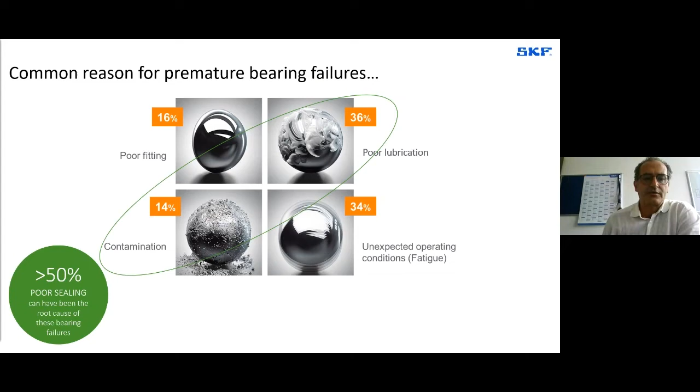So it's very important to have the right choice in terms of design and also in terms of material, to be able not only to, as we can see from this picture, but to be able to have the main function of the seal, as you can see from the picture.

So we have seals integrated to the bearing, able to keep inside grease or oil and keep outside the contamination. We have the same function for bearing seal or seal alone assembled outside to the bearing. What is very important is that the seal cannot fail, because if we have grease leakage, we can have a certain limitation on the life of the bearing.

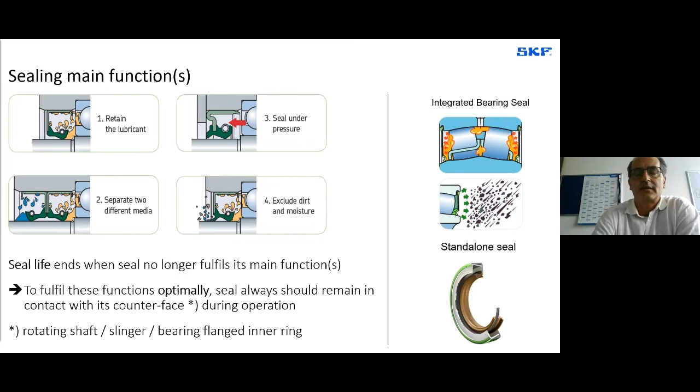But the same, if we have contamination ingress, we can have more or less the same failure on the bearing. So again, what is very important is to have the right choice for the application, for the right geometry, but also for the right material.

One typical case where it is possible to have a big contribution and to offer a very good solution, to have very robust tools, is to have a different configuration. So this is just an example where it is possible to have bearing seals and to have protection of the bearing and to keep a certain grease inside the bearing, to have a second barrier able to keep

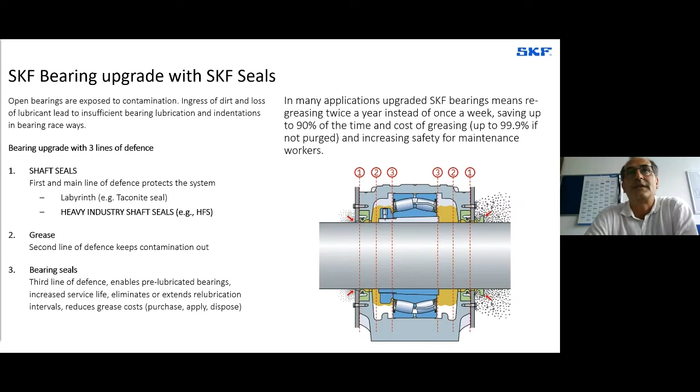inside again grease or oil or separate the media, and to have again another extra sealing that is machined in this case, where it is possible to have extra protection from the environment. So just to have a good protection of the complete system and to avoid any issue during the application.

Just some typical examples of a wider range of application, of course. So we are speaking about all bearing families, from the small DGBB to the bigger one that is for the large seal or SRB, where it is possible to assemble and have a component integrated to the bearing, or it is possible also to have an extra component outside the bearing.

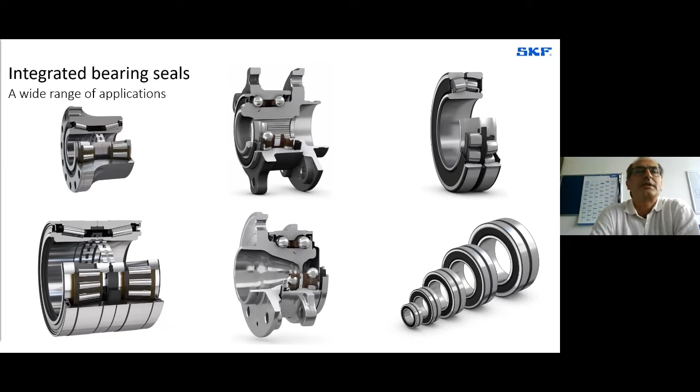Here are some typical examples where it was possible to have this kind of job and to have a very good solution to offer the market. In this particular case, the spherical roller bearing, as you can see from the picture, is a typical work of the bearing where there is oscillation.

There was a different solution in the market, so we standardized using just one common solution to fix some problems in production, and to improve the logistics from the factory. Using this kind of geometry we were able to standardize not only the bearing but also the seal, offering a very good solution able to reach more or less 50% friction reduction.

That is a very important point because, of course, it also means less energy consumption. And improving the grease life means we can increase the maintenance or lubrication interval of the part, and also have the possibility of higher speed.

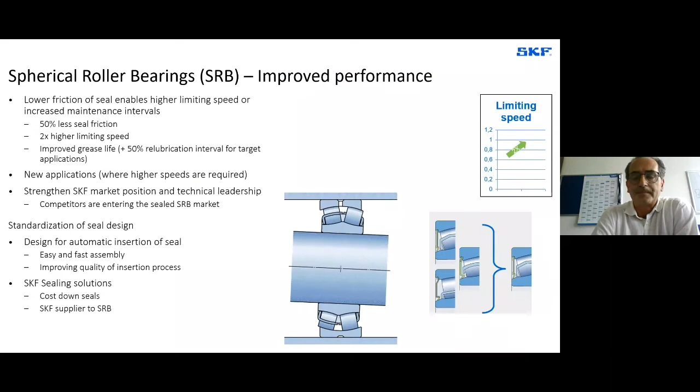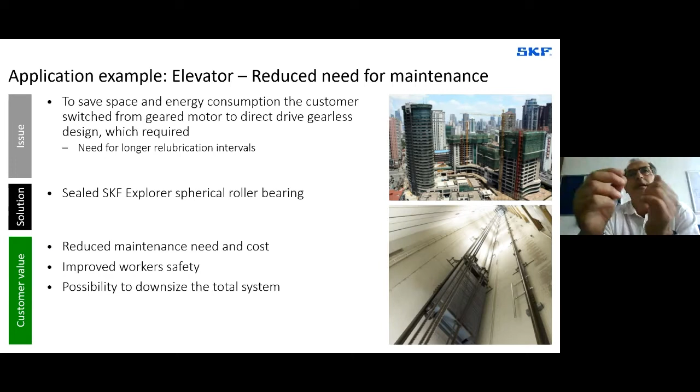In the final application, we have a good advantage because there is the possibility to reduce friction, increase the speed, and reduce the complete unit by changing the system. Of course, we need a different solution to assure that the grease inside the bearing remains for a long time - I don't want to say life, but more or less, yes.

Another typical example where it's possible to customize and offer a very good solution in terms of sealability, and fulfill the complete requirements from the application, is again a spherical bearing, but in this case not for the elevator market, but for industrial use in general. Also in this case, the solution was developed according to different requirements.

In this particular case, we fixed the parameters based on the current solution, and now we are able to reach more or less double the life. The sealing function is much better, and we can assure a different performance on the seal, on the bearing, the complete bearing.

This is a typical example of where this part is allocated. Of course, this picture cannot completely show the leakage of the unit, but shows how we - or the customer - can grease the part just to avoid having a different greasing interval. Of course, we have a lot of grease that comes out from the bearing, and this is a point we would like to avoid, not only from the bearing point of view, but also from the environmental impact and so on.

Using this kind of solution, we are able to better keep the grease inside, and also offer the possibility to grease the part without any other issue. So when the grease comes into the bearing, the lip will open, and when you see just a small amount of grease, we know that the bearing is completely full.

Same application, but a different bearing is used for this kind of solution. In this case, we are speaking about a more or less similar application and similar final industries, but the bearing is not a spherical roller bearing, but a taper bearing. In this case, we have a different condition in the application.

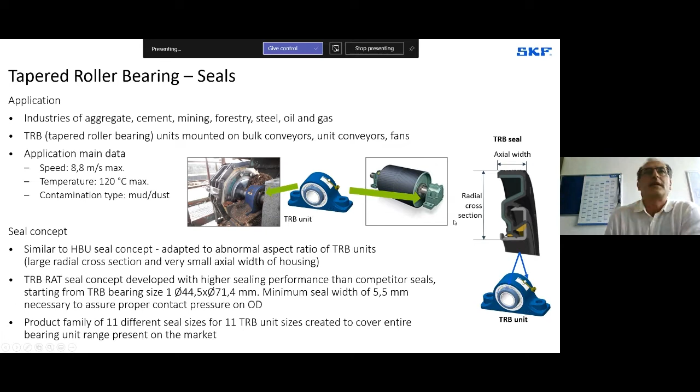It was possible also to allocate a different solution, not only with two or three different lips, but in this particular case we also had the possibility to assemble a cassette seal, because the environment in this case is different and quite, let me say, severe.

Another big family is the plain bearing, where the importance of this application is to have a very clean surface where the seal has to work. Otherwise, considering that this kind of bearing has no grease, if we don't have a good seal system, we can fail in a very short time.

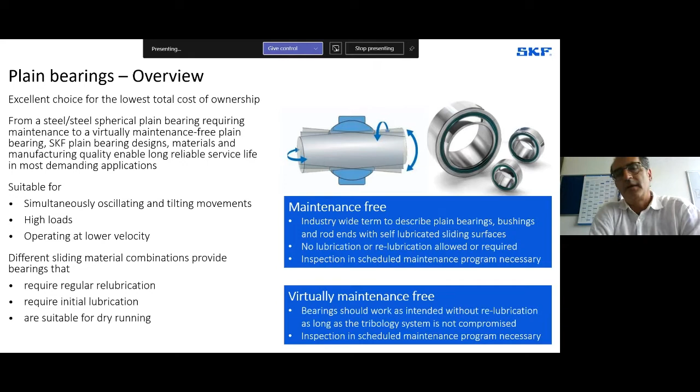This is a typical bearing that is used in many industries, not only for industrial applications, but also automotive, trucks, agriculture, so it's very important to have a very good solution able to avoid any problem on the bearing. The typical solutions are the three different ones that we can see here.

We have the solution that is able to be anchored on the groove of the bearing, but we put more attention on preventing, when there is rotation of the bearing, any problem in this area - because when there is rotation, the possibility of a flip, the lip reversing, is quite common.

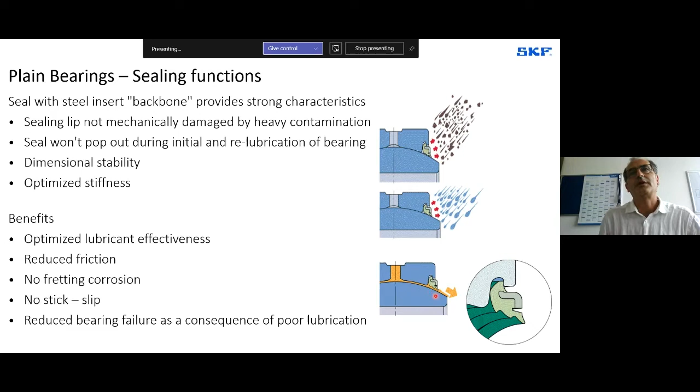We must not create a lot of friction, because otherwise we can cause damage during this movement, this oscillation of the bearing. We have to offer a solution that is very robust in terms of sealability, able to avoid any water or contamination ingress into the bearing, and able to keep the bearing surface very clean, avoiding friction or any other problem.

The industrial application where this kind of bearing is used is, of course, used for many industries, and it's very important. For example, in this particular case, we have a concast used for metallic parts to create the metal, and the temperature range is very high, so we have to pay attention to the material instead of the geometry.

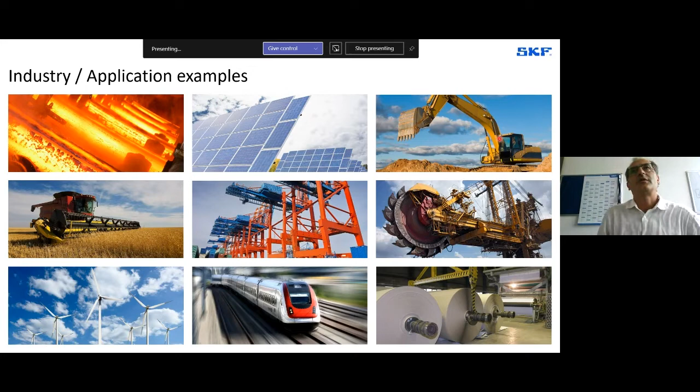While, for example, it's very exposed like in agriculture. In this particular case, the issue is not linked to the temperature, but to the environment and the contamination.

Making a difference means having a very good solution. We know that to work and to substitute or maintain parts in such machines is a very huge job, and it costs a lot of money to have a very good solution.

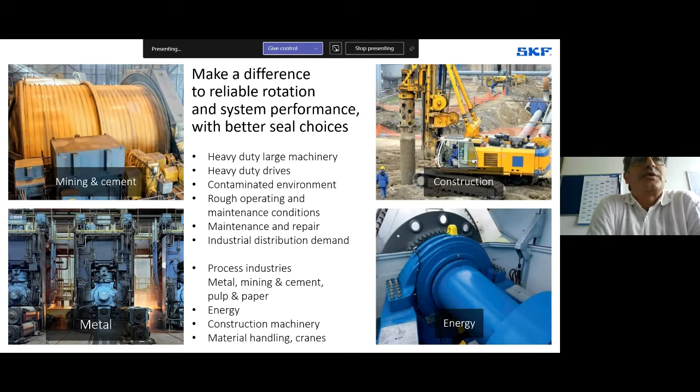So having a good solution means avoiding any problem or issue in the real application, but also avoiding any extra cost due to maintenance, repair, or relubrication intervals. So the intention is to have a very robust design that can give the best performance and the best value added possible to the final customer.

One other area where we are focusing our attention is food and beverage. Apart from the different geometry used, there are seals alone mounted as a complete unit outside the bearing, or there is a different labyrinth seal integrated into the bearing. The important thing is that we have material compatible with this food market—not only the rubber material, but also other elements or plastic material used for other applications.

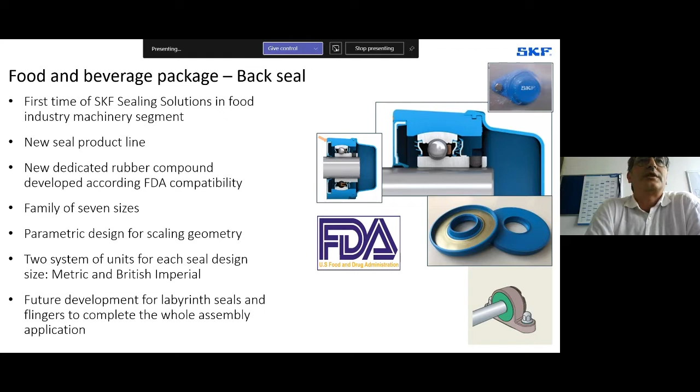Other area where we are present, and where we are investing a lot of time and money, is agricultural application, where there are different solutions for different segments of this area. For example, where there is a tractor and the axle on the tractor, we have a pinion seal, and also a wheel seal. A typical example is the MUD 11, which is a very robust design, developed in order to keep contamination outside.

You can see it's very robust, with a lot of lips that keep contamination outside—water, mud, and so on. In this particular case, we have the wheel with oil, and there is a seal able to keep the oil inside.

There are many other applications where we have more or less the same extra lip for contamination, but instead of a spring and lip dedicated to oil, there is a grease application, so we have a different concept. But at the end, the concept is to have a very robust design, like a cassette solution, just to improve and avoid any water ingress or contamination ingress.

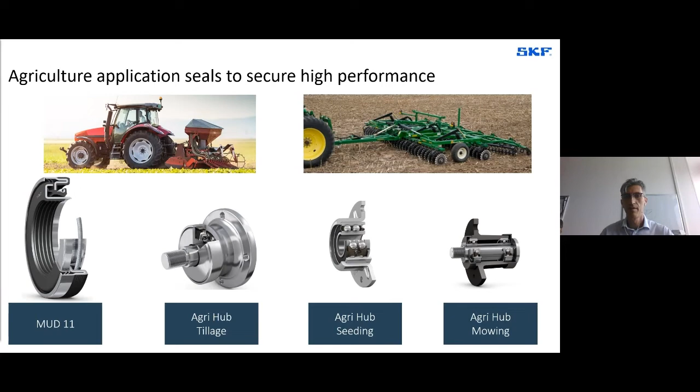Please go ahead. Now we move to other kinds of products: the HBU, hub bearing unit, used for car applications, and the THU, truck hub unit, used for the truck market. Here's an example to give an overview of what a bearing for a car means. This is in particular a third generation bearing - we'll see later what the generations are - and I'd like to show you all the parts of the bearing for a better understanding.

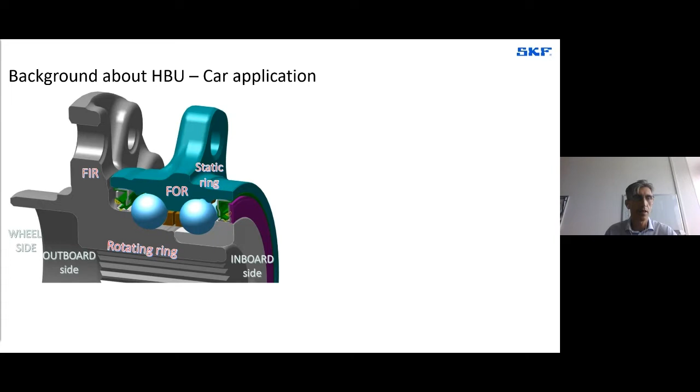First of all, on the left side you can see this is the wheel side, to identify the bearing in outboard side, inboard. We usually have a rotating ring, the internal one. This one in particular is called FIR, flanged inner ring. We have a flanged outer ring, that is a static ring in this part. We have the seal, inboard seal and outboard seal.

It's important to call them this way because, for instance, for the HBU3, outboard and inboard seal cannot always be the same seal, due to the fact that during assembly we have to take care of some operations, and we need to avoid issues due to, for example, lip reversal during assembly.

And we have on the outboard side a flinger in this specific case. That means it's just a metal part that is used - this one - it's a metal part used for the lip counterface.

We have an encoder, that is a magnetic ring used for the ABS system. For car applications it's 99% on the inside. Flinger and encoder provide the seal lips counterface.

Provide a seal with the counterface. That means, for instance, in this specific case, the complete system - we call it a cassette seal. That means seal plus encoder.

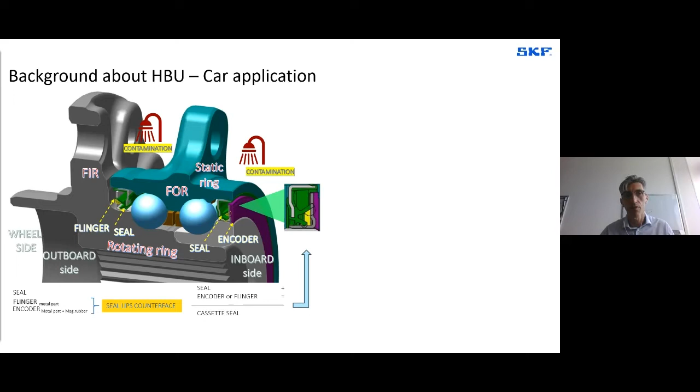Important to know that for car, but also for truck, we provide customized solutions and not standard solutions for all products. This is due to the fact that we have changes in dimensions and changes in performance due to customer specifications.

Same thing we can see for the truck application, and this is the layout we have, for instance, for a bearing in this case a THU used for this overview. One of the main differences is that for the truck we often, more or less always, have the rotating ring as the outer ring. The inner rings in this case are the static rings.

Then for truck we have two different kinds of seals used for the inboard side and outboard side. This is the wheel side, and it's an outboard seal, and for a driven unit, as shown in this picture, on the outboard side we have an oil seal. Oil is coming from the axle, and the bearing is more or less always lubricated.

We have this mix - we don't have to have... on the other side the contaminant is, let's say, the external environment. Then the kind of seal we are using on the external side is like this one.

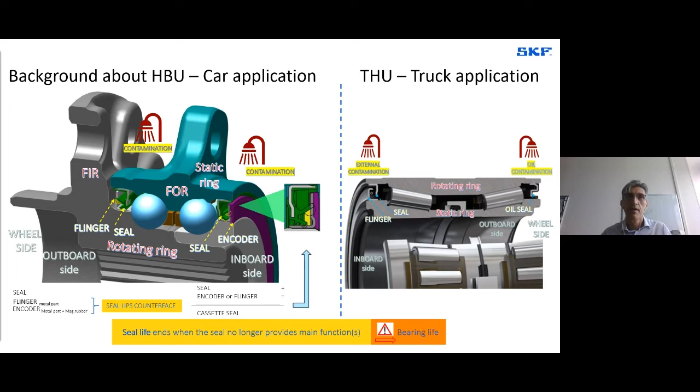Now I wish to show you the background about hub bearing unit and truck hub unit. Starting from the hub bearing unit for car, we can see that we can have different kinds of product. This one is the HBU1. HBU2 - now I will explain to you the main difference.

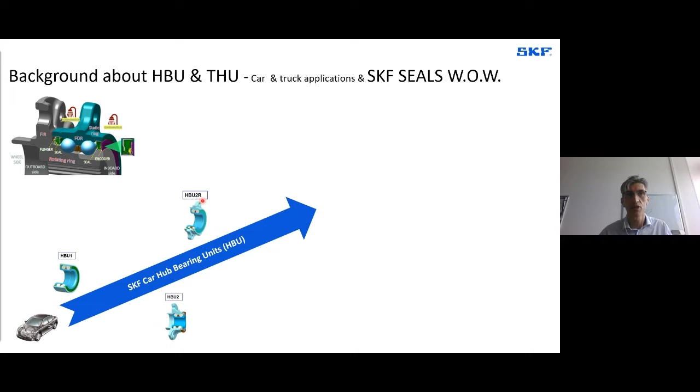The main difference between those two generations of bearing is that for the HBU1, we have the inner rings, while for the HBU2 standard one, we have the outer ring that is flanged. For this specific HBU2 generation, we also have the one called reversed - that means we still have the internal ring rotating in this specific case. We have cases where we applied the HBU2 standard with the outer ring rotating.

Then moving to the third generation, that is the one I showed you before, we have external ring and internal ring with flange. We call it flanged internal ring rotating. For this specific case, we have also tapered roller versions.

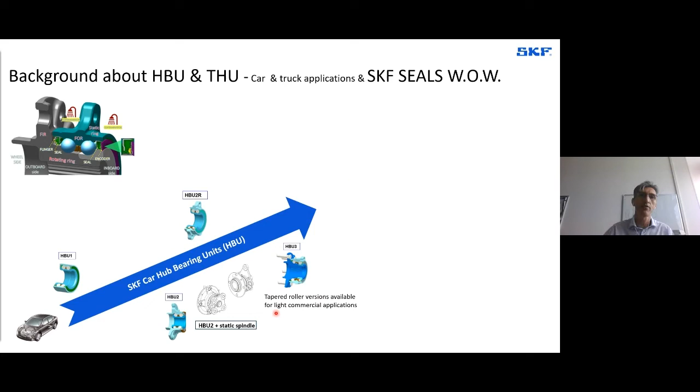Going through the applications for the trucks, we have also a kind of bearing that we call the truck matched unit. We can have assembled units and truck matched units itself. For this specific product, the seals are assembled by the customer itself.

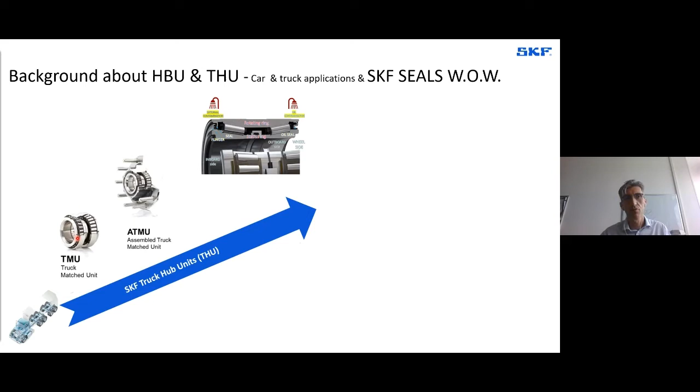Then we can move on to the other generations. The first generation is very similar to the car applications, and it means that we have an inner ring.

Daniele, sorry for interrupting. There are some interruptions in the audio. Could you please move your microphone a little bit closer to your mouth? Otherwise we have some interruptions. Yeah, I guess that's better like this. Yeah, hopefully. Okay, thank you.

Then here we have the first generation of the truck hub unit. We have no flange on both the inner ring and outer ring. And here we have generation 2, which has the external ring with the flange.

Those are kinds of bearings that we are supplying to our customer, and you have to consider that when we give these products to the final customer, the sealing system provided directly by us is already equipping the SKF bearing units, both car and truck units.

Then I would like to show you SKF's way of working. First of all, we look at the final applications, because we need to know where the seal is applied on the bearing, but not only the bearing—we need to know where the bearing is applied, which means we need to understand the corner layout.

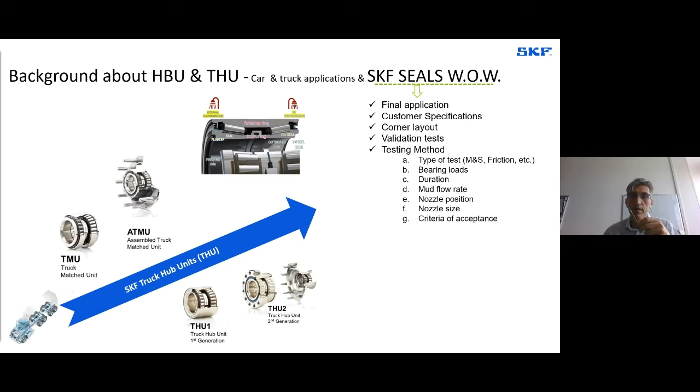It's also important to know which method we have to use for testing. We go through all those items: mud and slurry test, friction test, etc. These kinds of requests are really important to be evaluated at the beginning of the project, because performance in sealability and performance in friction are really important today—friction is one of the most demanding things coming from the final customer.

But at the same time, keeping the same level of performance while having less friction in our system is a good challenge.

Then we have to evaluate the bearing loads—meaning we have to see the relative movements in the parts and see how we can always keep the followability of our lips with the counterface, the duration of the test, the mud flow rate we have to have during the test, nozzle positions, meaning where the contaminant comes through, and nozzle size, which evaluates not only the flow rate but the pressure of mud going against the bearing during the validation test, and of course the acceptance criteria.

All those tests have to be evaluated at bearing level and component level, because some things are done directly on the seal itself, while several tests are done at the bearing level—meaning complete units. All those points allow us to identify or create a completely new seal concept.

In addition to that, we have to add some other studies. We do these activities when we receive new requests, for instance regarding low friction, by having the possibility to include new labyrinths—meaning that we need to have the space to create this labyrinth.

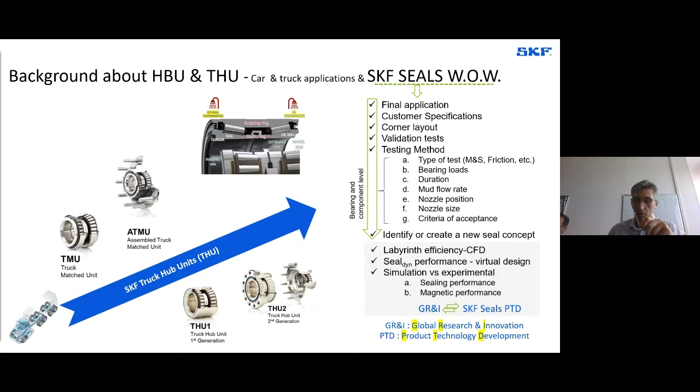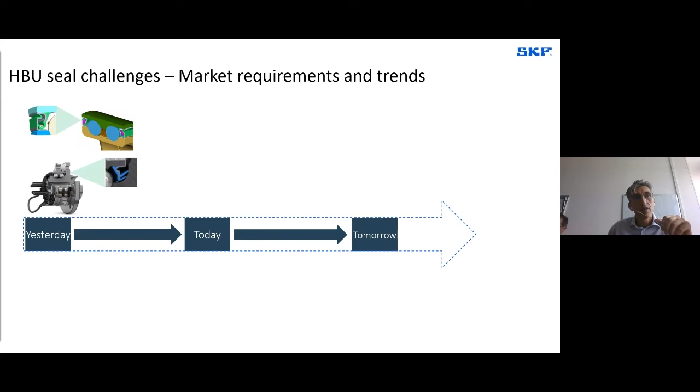Now I'm going to show you the market requirements and trends that we have for friction. Starting from the very beginning, this is the kind of old seal that we were using in the past. And this is a kind of seal that is still in use today, but is something that is going to be changing due to customer request.

We have some other products, as you can see on the outboard side. In the blue picture above, we have a seal that is sliding against the bearing itself, while at the bottom we already have a cassette seal also on the outboard side. This is due to the fact that the customer is asking for having also a stainless steel counterface for our lip.

Then in between today and tomorrow, we already have some solutions in terms of labyrinths. Of course, considering that friction reduction is really demanding, we need to move with new generation seals. When we say labyrinths, we mean all the parts that are in front of the main lip. The main lip is the one touching the counterface.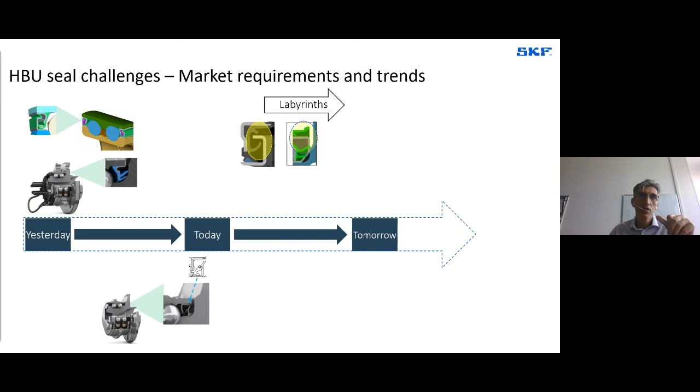Everything is done usually with a non-contacting lip, and it is designed in order to keep contaminant outside and to allow only a minimum quantity of contaminant to reach the main lip.

Of course, we are also working on new solutions. They are under development, and we already tested some interesting solutions, and we will be happy to have the possibility to show you in the future.

If we fix the axis of time in years and friction in Newton meters, we could see that the trend coming from customer requirement is in this direction. It means that from old, yesterday's seals, let's say, till tomorrow's seals, we can see that this trend is asking for friction reduction. Of course, this friction reduction is not only required for seals, but it's required for the complete unit.

We think that the key is to have seal plus bearing plus knuckle studied all together. We already provided some solutions working on the seal and the bearings, and we also had the possibility to design some solutions with the final customer by giving suggestions on the knuckle geometry, and we were able to reach very good results.

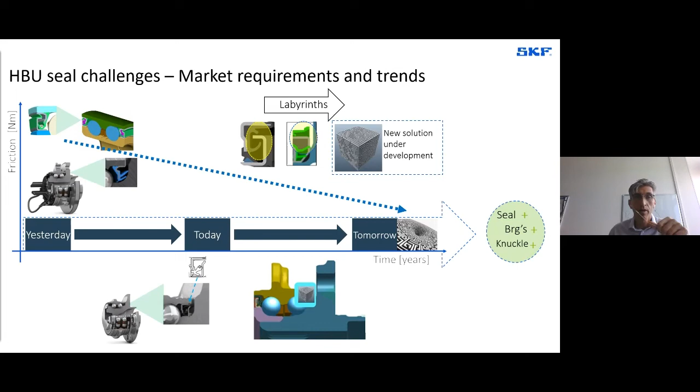I'd like to show you also what the trends mean in terms of magnetic requirement. First of all, I would like to identify what we mean by air gap, because we work mainly with crystal air gap.

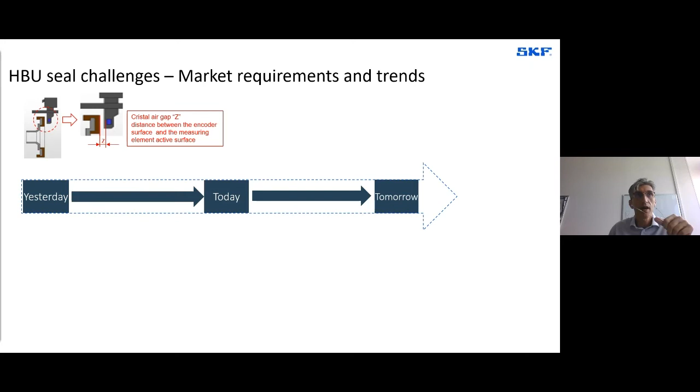The crystal air gap is the one that can allow us to understand if our encoder is performing as per customer requirement. We have driven units where the air gap, let's say the general distance of the sensor from the encoder surface, is in between 1 millimeter and 2.2.

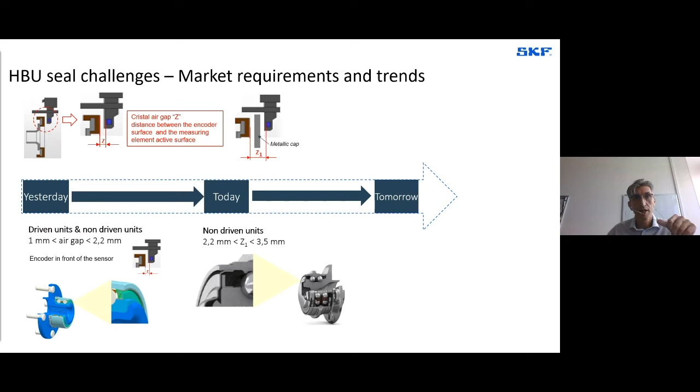And we also have non-driven units where the crystal air gap is much higher. This means it's more critical to be able to read the signal and to supply this kind of solution to final customers, just because the sensorizations in the final application are changing. This means we also need to move with these new sensorizations in-house in order to be able to follow our customer, and this is something that we are already doing, of course.

This change in the bearing by using a metallic cap in between the encoder and the sensor itself is also due to the fact that fixing a cap makes it possible to avoid having seals inside the bearing. No seals means no friction in this area, and this is one of the points used to reduce a lot the friction of the non-driven bearing.

Considering the corner layout, sensorization and magnetic field, until about 2 years ago we were focused on one direction of the magnetic field that we called the Z direction, the one perpendicular to the encoder surface. Now our customers are demanding magnetic field in 3 directions, and the reason is because sensorization is also going to change; they are going to use sensors able to read signals in different directions.

Also in this case, if we put the two axes in time and years, we see the trend is to increase the air gap. Maybe the reason is that these new sensors are more sensitive than the previous ones, and at the same time the way of reading the signal is changing. They are using different kinds of technology, and they are able to get the right value they need for the electronic systems of the car, also by keeping a higher air gap.

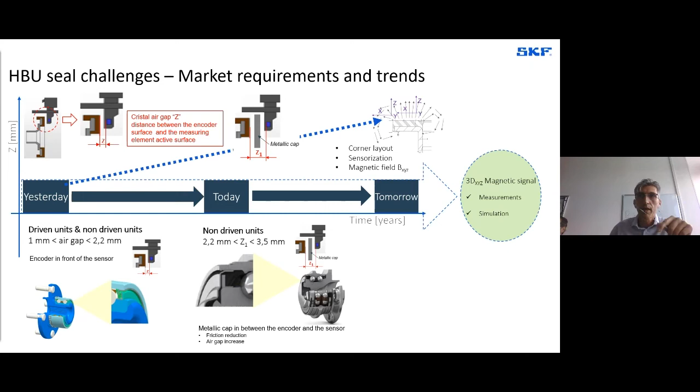The key for us is to be able to measure and simulate this signal in the 3D directions. We are already equipped with this specific equipment, and we can already do these measurements in some locations. Then we need to enlarge our capability in that direction.

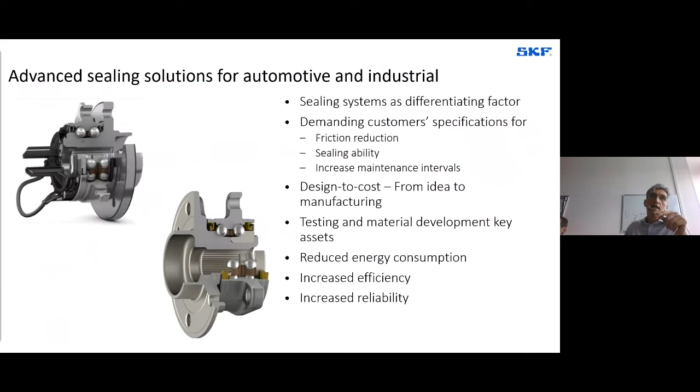Advanced sealing solutions for automotive and industrial means, for us, sealing systems as a differentiating factor, and this is possible because we can work together with our colleagues in the bearing area. Then we can fix everything together. We have the possibility to have friction reduction, sealing ability, and increased maintenance intervals, and it can be done also by working with this synergy between the two areas.

Design to cost, from idea to manufacturing. We already started also in this phase. In fact, we have our business development going to speak with manufacturing costs and so on at the beginning of the project, in a way to identify in which way we can design the bearing, in which way we can design the seals, and in which way we can optimize the complete system.

Testing and material development is something we do continuously. We are going to be better day by day in terms of testing in order to have much more reliable results coming out from the testing area. Material development is really key for our product, in particular for the sealing system, because rubbers need to be competitive against environmental and chemical agents, and compatible with all the environments we need to face for the product.

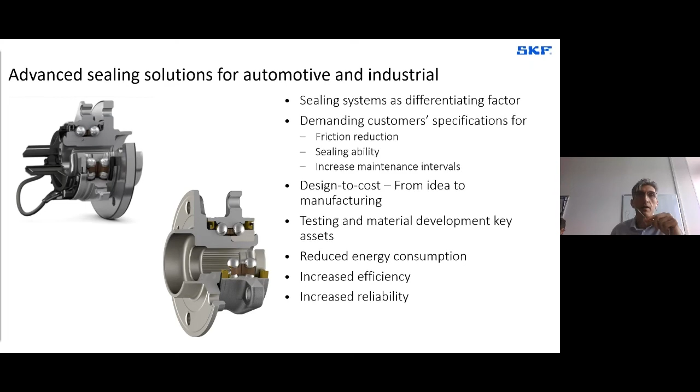A new way of working that we have already implemented and have been using for more or less 2 years. We have the two parts, SKF Bearings and SKF Seals. We are recirculating information and sharing knowledge between us in order to understand which is the best solution.

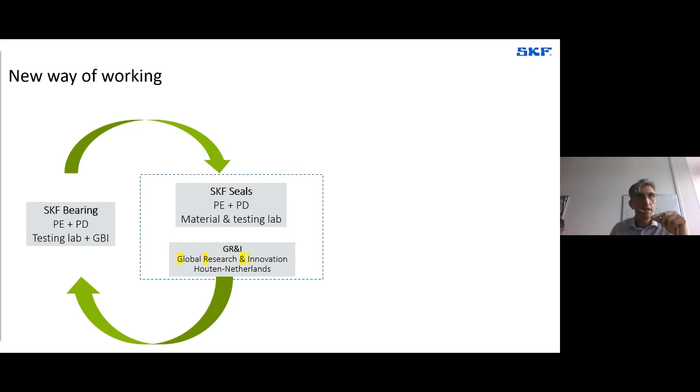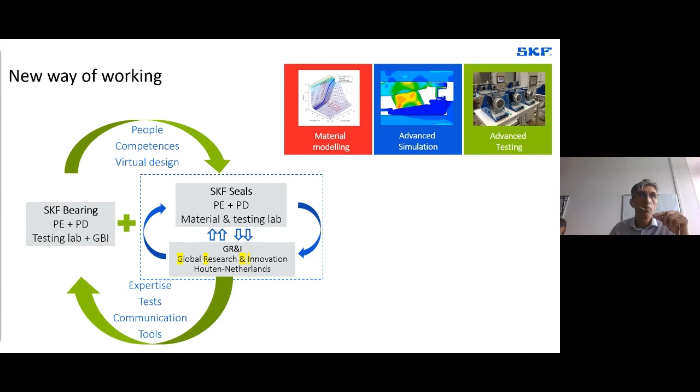We do it with the product engineer, plus product development and product design, with the testing laboratory, GBI - Global Bearing Investigation - which is really important, located in the bearing area. We have a material and testing lab here in SKF Seals, and together with this we are working with Global Research and Innovation, located in the Netherlands, for material modeling, advanced simulations, and advanced testing. In this way we can have on board the expertise and competencies from both sides, bearing and seals, in addition to our specialists in simulations.

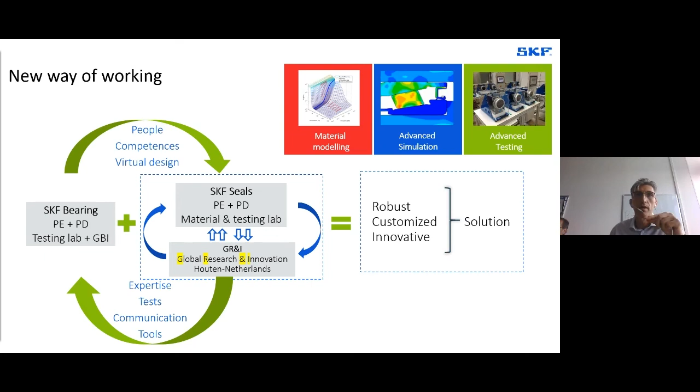Doing work in these directions, we are convinced that we can give and deliver to our customer a most robust, customized and innovative solution. Here's an example regarding fluid dynamic simulations that we have done on a specific project.

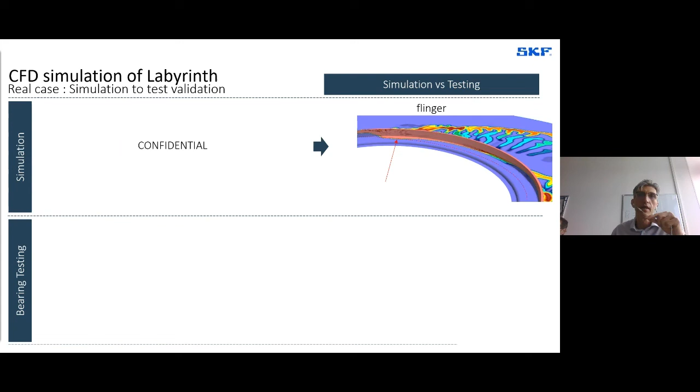Then we need to give the right inputs to our colleagues in Global Research and Innovations in order to perform the right calculation.

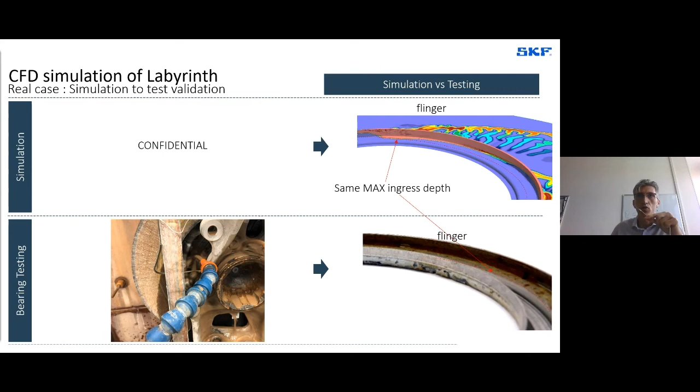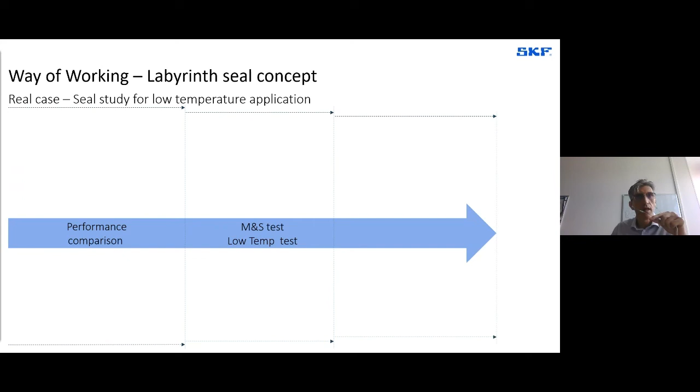Here's a brief example regarding a real case for low temperature applications. What we did was a performance comparison with a project we were working on, in order to better understand the performance of the seal for low temperature. We did mud and slurry tests and low temperature tests in order to arrive at an SKF seals proposal.

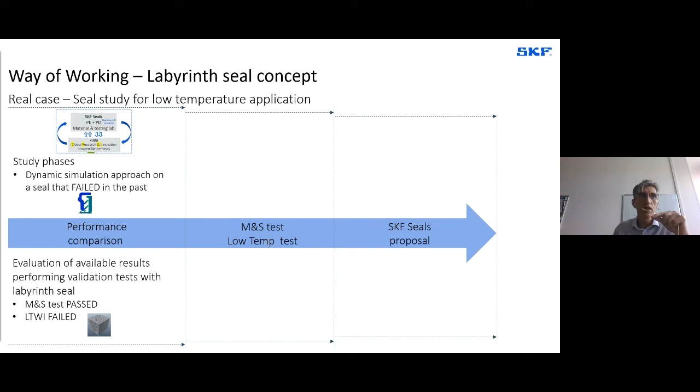In the first part of the project, we considered a dynamic simulation approach on a seal that had failed this test in the past. At the same time, we put on the table another test to understand the meaning of passing the mud and slurry test, and the possibility of also passing the low temperature test.

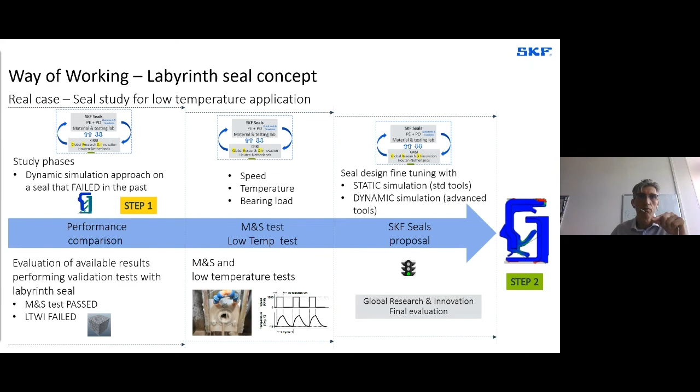In step one, we have a simulation that takes into consideration all the boundary conditions and constraints on the bearing - deflections, bearing load, temperature, and so on. This is done at very low temperature, more or less minus 20 degrees.

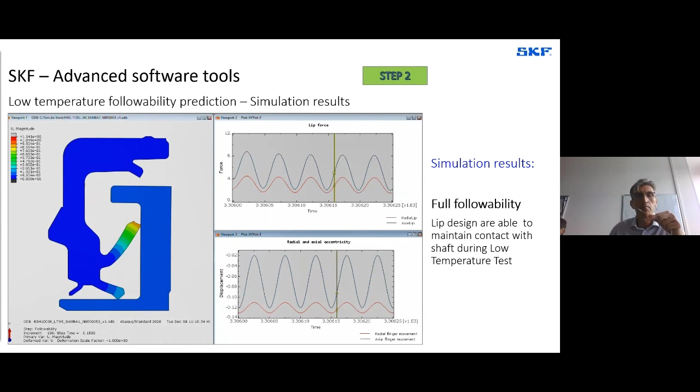In the new design, the scenario is completely different because we were able to keep good followability - full followability - and the forces necessary to ensure performance. We were playing on design, on material, considering speeds, temperature, and many other factors due to the rubber itself.

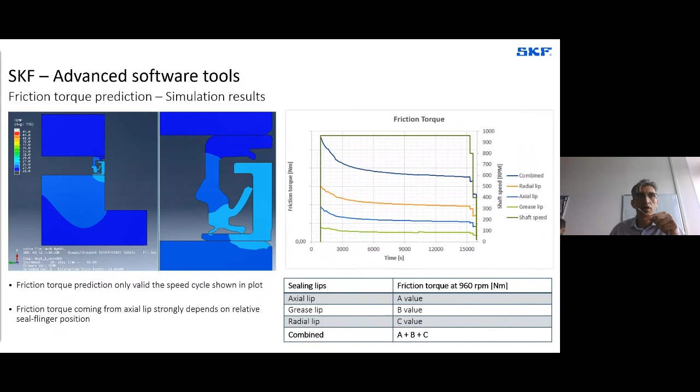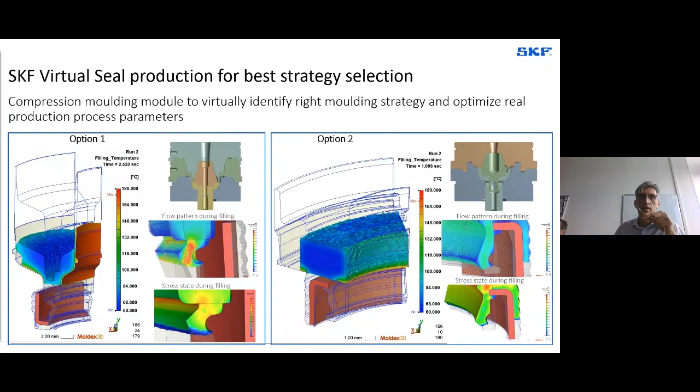Otherwise, for many products, we're able to understand the best position, the best way to produce it with the process we have. We also have the possibility to make parts by injection process.

In addition, we have to remember that in our Global Research and Innovations, we are not only doing simulations, but also experimental tests, because we need to link the two parts.

When we move to a new challenge or scenario, we evaluate the best way to make these simulations, and at the same time we study with the help of GR&I, Global Research and Innovations, the best way to test the seal in that particular condition.

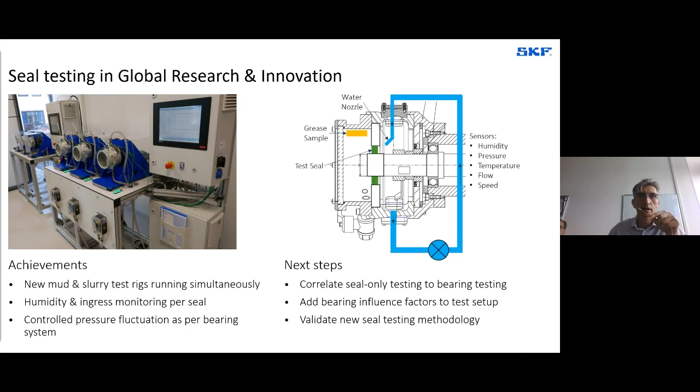We are convinced that the right seal can make all the difference in ensuring reliability and performance in an entire machinery system.

We have the possibility to do it because we work with our colleagues on the bearing side, and we're able to put together all our knowledge to arrive at one integrated solution for our customers.